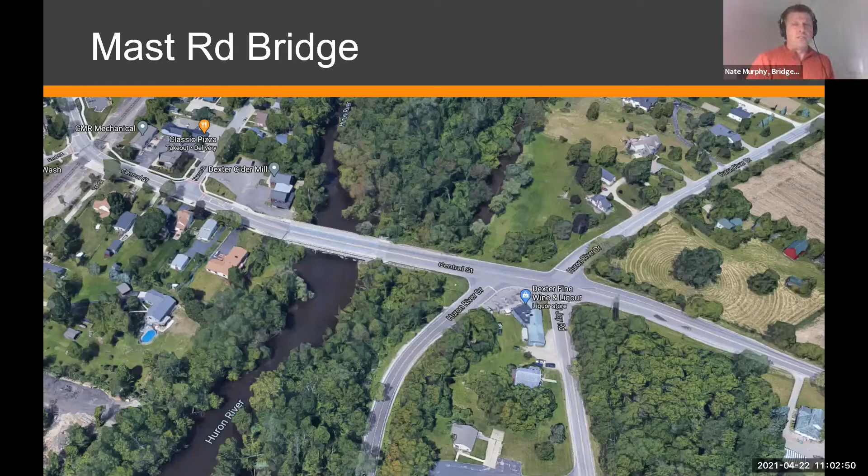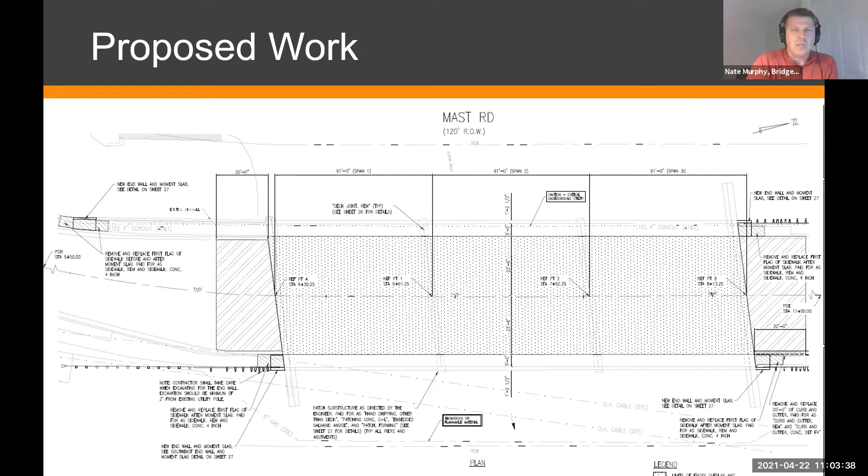While we're out there, we'll be doing other repairs needed to keep the concrete in good condition. So the proposed work will include concrete repairs on the substructure, that's the piers and abutments down below the bridge, as well as the deck and the railing. What that means is we go out and sound the concrete to find places where it's delaminated, chip it off, re-pour it, and these kinds of fixes help the lifespan of the bridge.

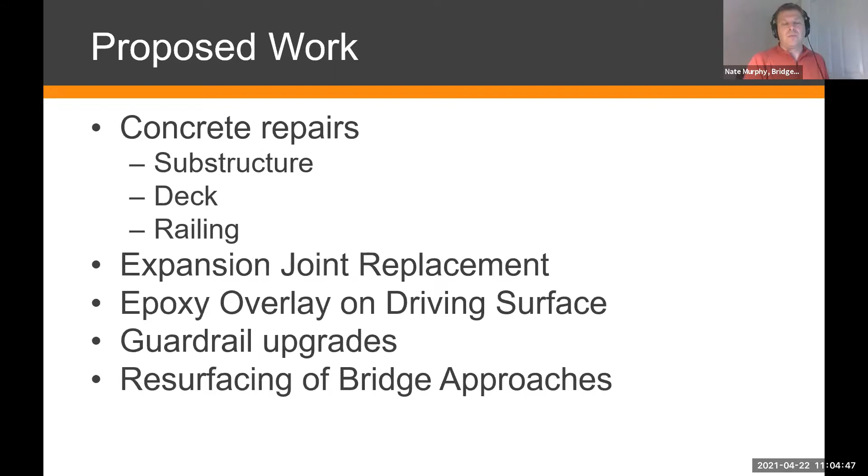We'll also be doing expansion joint replacement at each end, and then the epoxy overlay as I mentioned. We're going to be upgrading the guardrail, correcting some guardrail issues. And then we'll be resurfacing the bridge approaches. On either end of the bridge we have about 20 feet, just enough to get it transitioned onto the bridge, where we will remove the HMA asphalt pavement down a certain depth and then repave that.

And when we go in, we'll take all of that off and we'll apply an epoxy coating over the deck. As I mentioned, it will seal it up from the salts and chlorides that would go down and cause deterioration to the reinforcement and the concrete below.

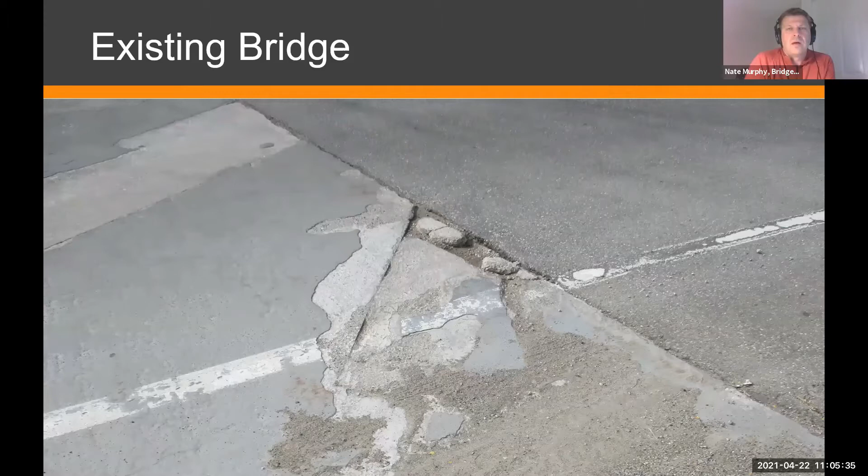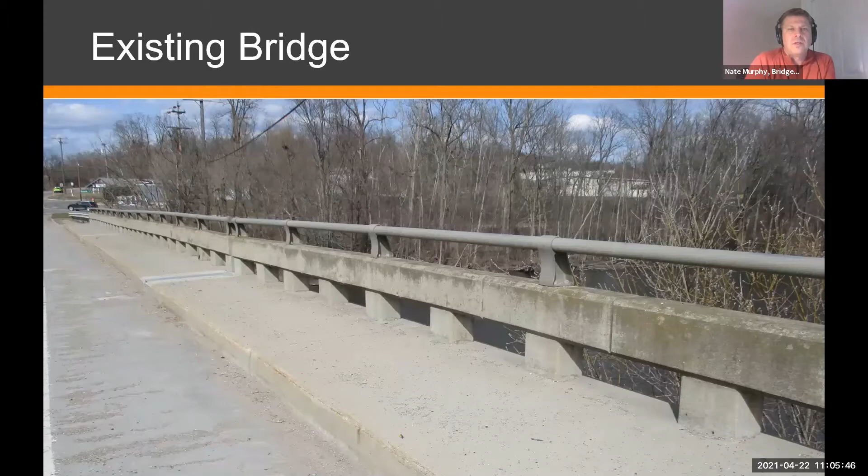So this is the main purpose of the project. You can see here the existing bridge. There are just places that need repair. We'll be chipping this out, repouring it, and then it'll be much more clean. It'll last much longer. Also on the barriers here, the railings, we'll be finding any places that have delamination. We'll fix those up as well.

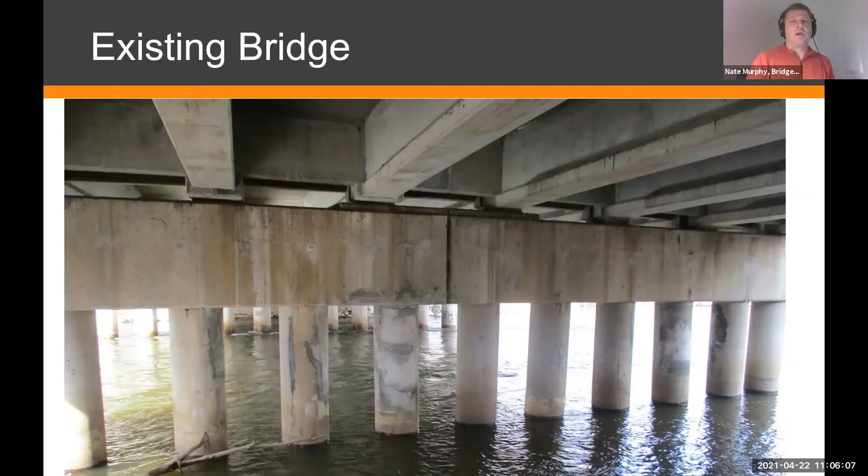So I want to talk about timeline and detour. These are the main things that will affect the motoring public. We have our contractor, E.T. MacKenzie out of Ann Arbor. We have done many projects with them and have a great relationship with them, so we're looking forward to working with them on this bridge.

They have a tentative start of May 3rd. That's when we're expecting them to get out there. That means at that point they will be closing down a portion of the road, and I'll talk about that in a minute. It'll be done in two phases, one side at a time, and we expect it to be fully completed by the end of July.

For the maintenance of traffic, we will be doing this as I mentioned in a two-stage project. This will allow us to maintain traffic in and out of the city of Dexter during the duration of the project. We will never close it down, but we will be maintaining it in one lane on one side of the bridge.

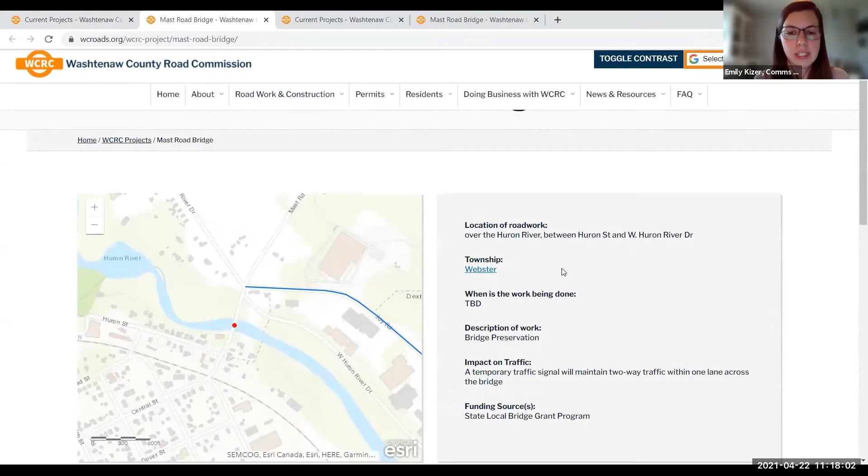So again, for these bigger projects, we've created a project web page where we've got a lot of the information that Nate shared already today and that Aaron shared. We will provide, this is under this helpful links area, that's where I'll post this meeting's recording and the slides that Nate is sharing. We've got Nate's contact information here, and then we do updates.

So we've got updates posted here. This is announcing today's meeting. As we get closer to the start of construction, which we expect to start on May 3rd, we will put another update here as we get closer to that.

You can also subscribe to receive these updates via email. You can get them either by going to the website, or if you click this 'subscribe to project updates,' it'll take you to our subscription page. And that's where, again, shameless plug, we do a lot of different emails, not just ones about Mast Road Bridge.

You can subscribe to receive emails if you want road notices for work we're doing by township. Also, if you want, we do a quarterly newsletter, and we have our weekly roadwork schedule that goes out every Thursday morning. I just sent the one out for next week this morning. We also do alerts on weight restrictions or bridge closures, so you can sign up to receive those.

And then down here is where you'd sign up to receive your project updates. So if you want to learn about or get updates as we go throughout construction on some of these major projects, you can do that through the subscribe page. Again, you can find that through the current projects part of our website, or subscribe to get those updates right to your email.

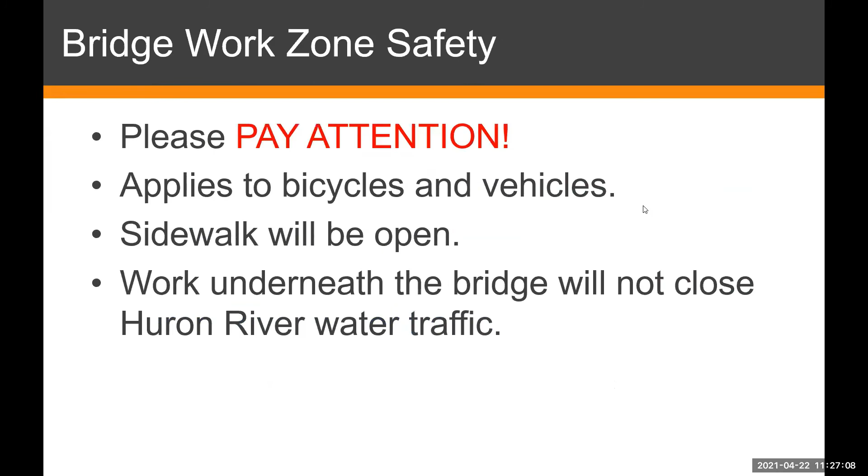My question is regarding where the barriers and the line will be for the signal to stop during the Central Street project back in 2011 or 2012. My house is 3668 Central, right where the yellow barrier and the light is essentially in front of my house. Initially that stoplight was between me and my neighbor's house towards the river, which caused getting out of my driveway to be a major headache. So I'm curious to know where that line is going to be for the signal and where the barriers are going to stop with regards to the driveways.

Okay, Nate, do you want to take that one? Yeah, we'll make sure when we get the barriers out there that you have access out of your driveway. This is a schematic based on the overall idea, but when we get out there and need to place those, we will adjust them so that you can have access for sure, and that's for the signal too.

We've got a little bit more flexibility at the south end because the posted speed limit there in the city limits is 25 miles an hour, for people coming out of town, northbound on Central/Mast Road. We've got a slower traffic scenario there, so we'll be able to bring that signal a little closer to the bridge and narrow up our barrier at that end. At the north end, for people coming southbound on Mast Road towards the intersection at Huron River Drive and Joy Road, we really need that signal and barrier further away from the bridge for safety purposes, to protect the motorists and the crew working on the bridge. That's going to be a longer run out.

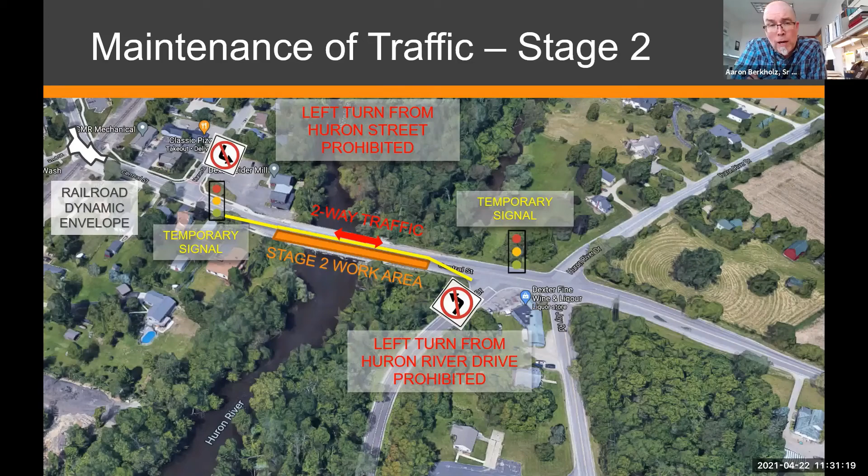We're fortunate that there isn't a significant crash history at 5 Points, and I believe that's because people are cautious driving through there. It's a known complex intersection, so people slow down and are very mindful. Honestly, people who live and drive through that area are very familiar with the intersection, and that familiarity also helps keep the crash history down.

Thanks, Aaron. It was just, like I said, curious if there were thoughts about that. I'm not necessarily advocating it, but it was just a question. Thanks, Robert.

I'll also jump in and add that ultimately there's a lot of needs in the county. This intersection does certainly see congestion during the peak periods, but we have a lot of intersections that are bottlenecks to our primary road network, whether 2-lane, stop-controlled or not. Ultimately it's about balancing all those needs, and we haven't identified funding yet. We're always looking for funding sources for solving situations like this, and we'll continue to do that.